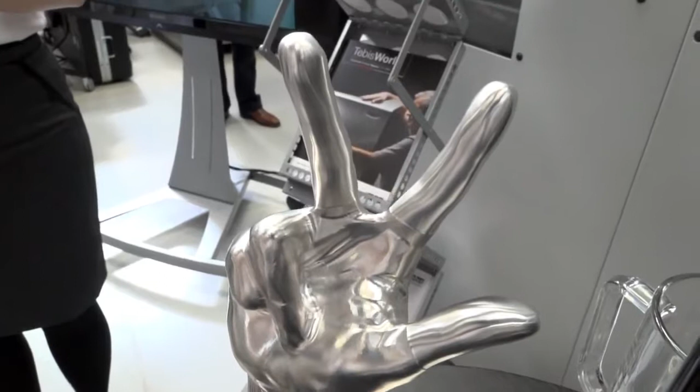Jill, what are Tebis doing here at Seco today? We are here today at Inspiration Through Innovation to showcase and demonstrate Tebis capabilities, and to show the manufacturing industry how introducing Tebis to your shop floor or workshop can benefit you.

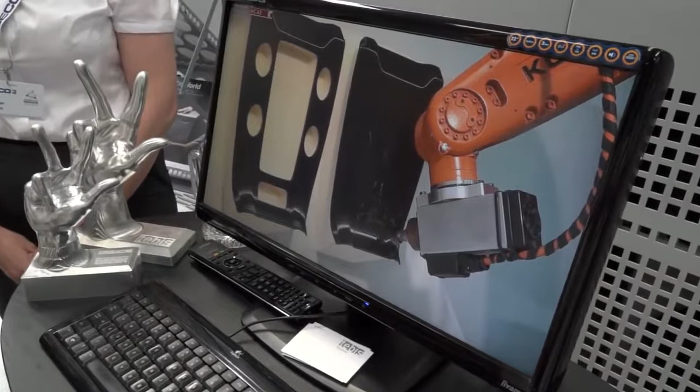And what are those capabilities? The capabilities we're showing is our new version 4 software with a fully customizable user interface. It's a brand new interface with software that is one user interface for everything. So we don't have a different package for CAD design, milling, or inspection. It's fully integrated, at the flick of a button, all in the same interface.

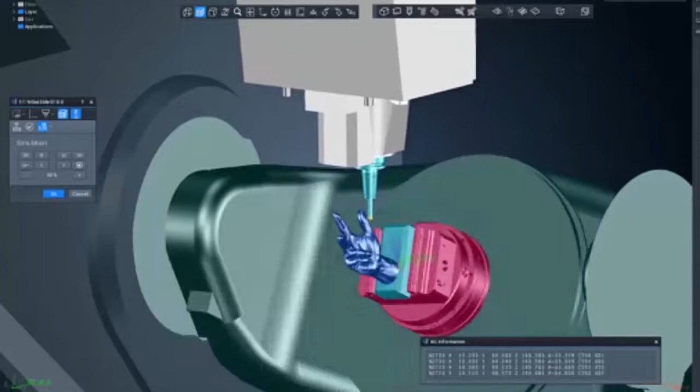Is that what makes Tebis different then? It does make Tebis different, and along with that we have capabilities for all our internal simulation, for everything from CNC machines through to robotics, trimming and other applications, as well as reverse engineering where we have integration with scanning arms.

As well as the software, what Tebis offer, which we see as different from other companies, is a full range of capabilities through what we call Tebis the process. So we have a consultancy arm. The consultancy arm can come into your business, look at your process, measure you against an industry standard, and point you in the right direction for improving your performance.

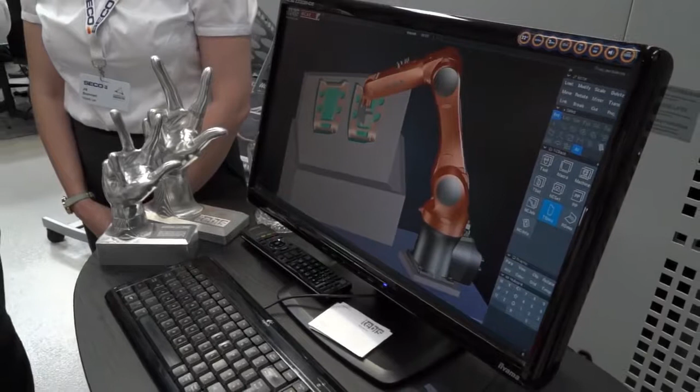On the second level is our core product, the software, which is very integral for the consultancy to say we can improve you using our software in these different manners. Following that, we have our implementation wing, which is important to follow the guidelines the consultancy team have suggested, and finally the training and support staff.

This is what makes Tebis stand apart from other businesses, because we want to offer a full shop floor solution as a partner, rather than just sell you something, let you use the software, and leave you alone.

And how about the ease of programming, and more importantly, how quick a part comes off the machine? How would you compare to the other companies?

We see ourselves at the very high end of this, because with the template technology we can automate the CAD/CAM process. So you input the data, apply the template technology, and the software will automatically select the data, process the NC code, and output it directly.

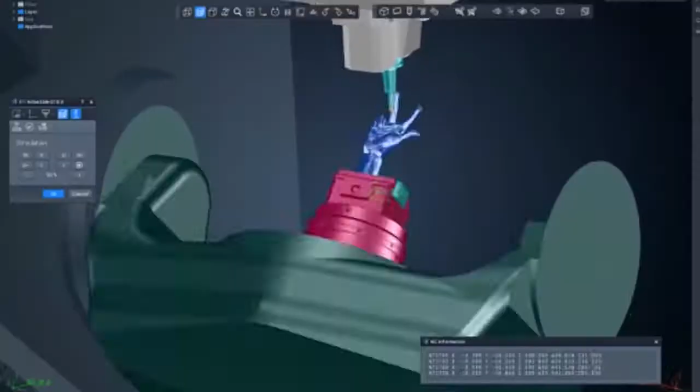Because of the way we actually process the code, Tebis, you'll see the toolpaths are very structured on the surface without a lot of air movements, which again is not cost effective for a business. What you'll see is better performance on the machine and a higher quality surface finish. Simple as that.

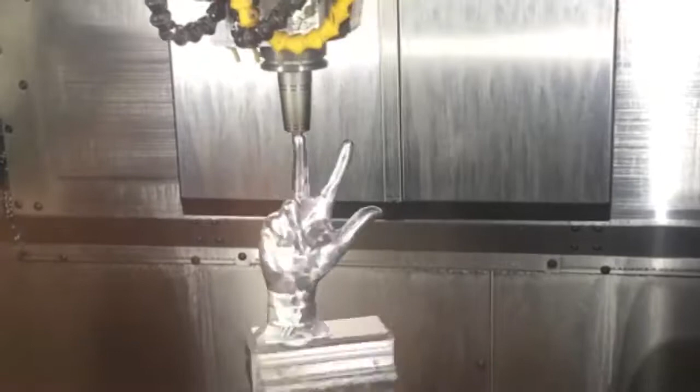Jill, what are these components we've got here? We've got a challenging 5-axis part here, and at the event today we are actually machining this so you can see all the 5-axis work and the detail that goes into it using Tebis software.

And Seco Tools, of course. Oh, and of course Seco Tools. Thanks guys, thank you very much.